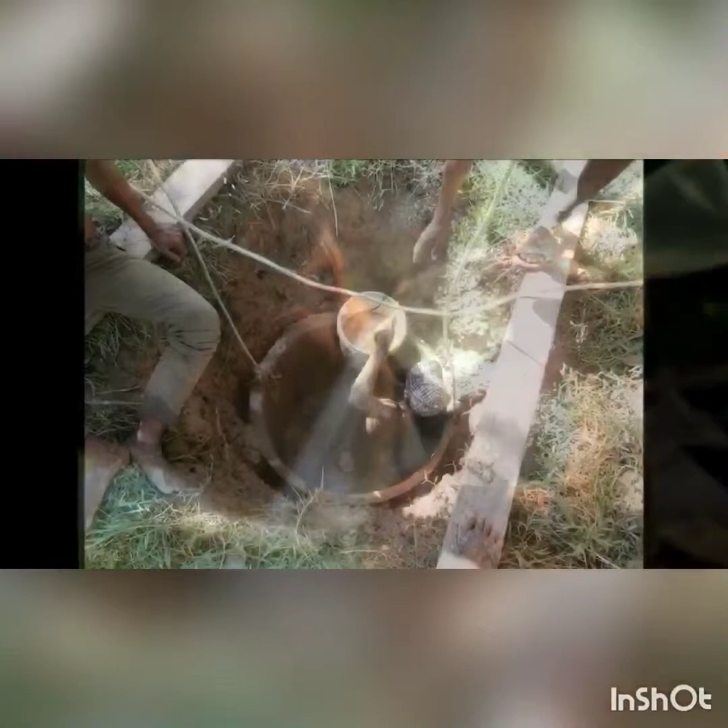In a country like Cambodia, the main source of any Cambodian's drinking water will come from rainfall. However, the rainfall is full of parasites and viruses which cause the Cambodians to get sick. The contaminated water mainly comes from improper waste disposal. Cambodians throw their trash on the floor, and that trash just sits in mucky water and leaks some toxins into it.

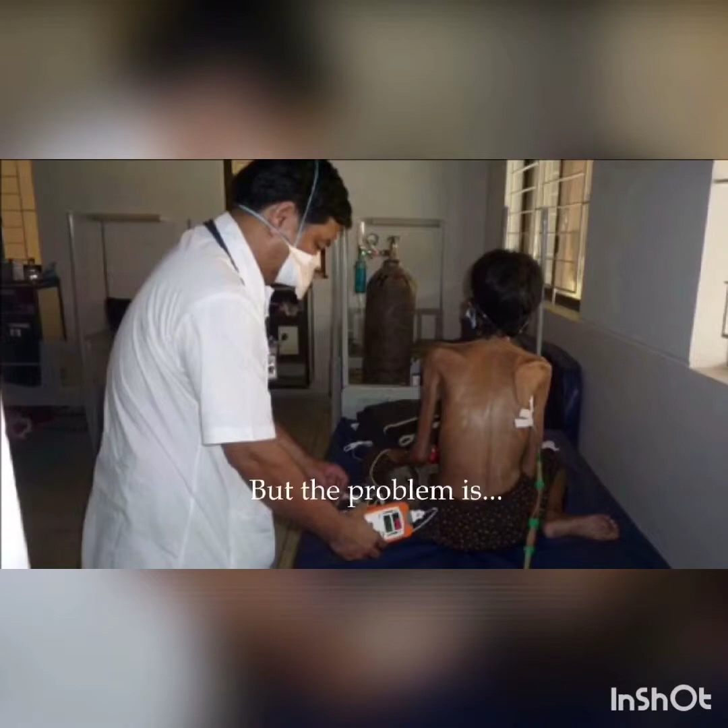The lack of infrastructure also causes the contaminated groundwater to mix with feces and other types of man-made waste and viruses, such as E. coli. Over 380 Cambodian children under the age of 5 die each year from diarrhea caused by the unsafe water and poor sanitation. The level of access to water supply in rural areas is significantly low, with approximately 80% of Cambodians living in rural areas having poor access to safe water and sanitation.

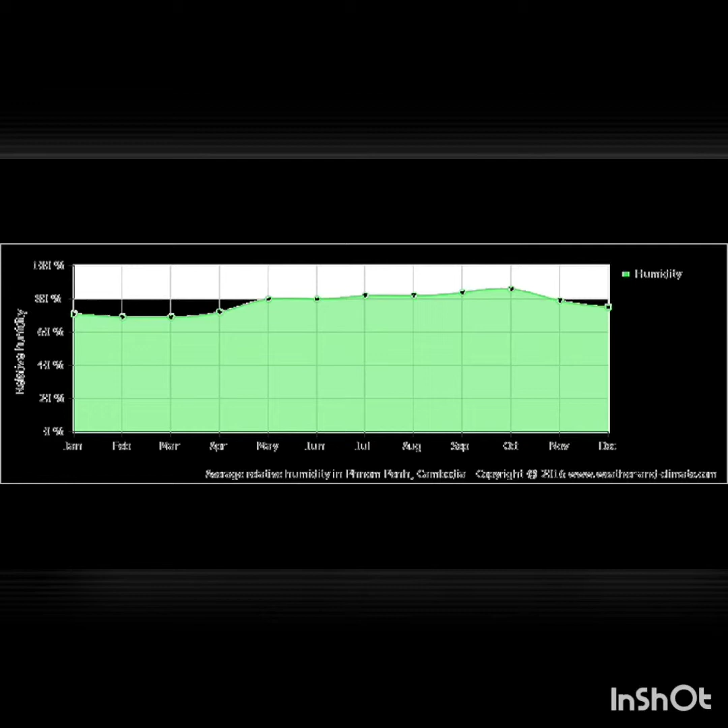So what can we do to improve the situation in Cambodia? Fortunately, the average annual percentage of humidity is 77%, and the major transportation in Cambodia is bicycle. Therefore, we decided to make a water purification machine attached on the bicycle, where a human acts as a generator to produce clean water during cycling.

We've found some companies that use a solar panel to let the bottle fill itself. Kristof Retezár is a designer who has created a unique bottle, exploiting the principle of condensation of moisture from the air to produce drinking water in any environment.

Of course, the amount of water produced depends on factors such as humidity or temperature. The device is powered by solar energy and comprises a condenser which functions as a refrigerator connected to a series of hydrophobic, water repellent surfaces. This bottle can produce half a liter of water in an hour under ideal conditions.

According to Retezár, if the ambient temperature is between 30 and 40 degrees Celsius and the humidity is between 80 and 90%, it will be in the best position to generate drinking water. But in reality there is always a certain percentage of moisture in the atmosphere as well. The bottle might work even in the desert.

The prototype includes a filter to prevent dust or insects in the water, but so far no pollutants are filtered. In this sense, Retezár is already proposing a version with a filter that will avoid that problem. The development has been christened with an appropriate name, Fontis. We actually did some modification based on the self-filling water bottle to make our own model.

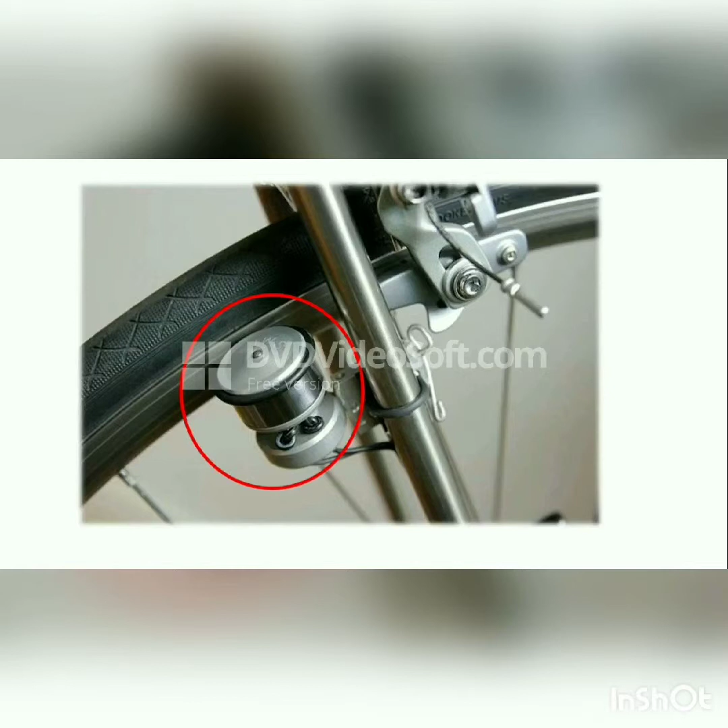In order to improve efficiency, we replace the solar power with human power, recycled and generated through a dynamo connected with the bicycle. When the wheel of the bicycle spins, it drives the dynamo through frictional force.

You may wonder how much energy can be generated by a human. In lab experiments, an average in-shape cyclist can produce about 3 watts per kg for more than an hour, for example around 200 watts for a 70 kg rider. It provides much more energy compared with a palm-sized solar panel, allowing more energy input for the condensation system.

Next is the condensation part. To achieve condensation, we will use a cooling system. Our cooling system is divided into two parts: the thermoelectric cooler and the airstream system.

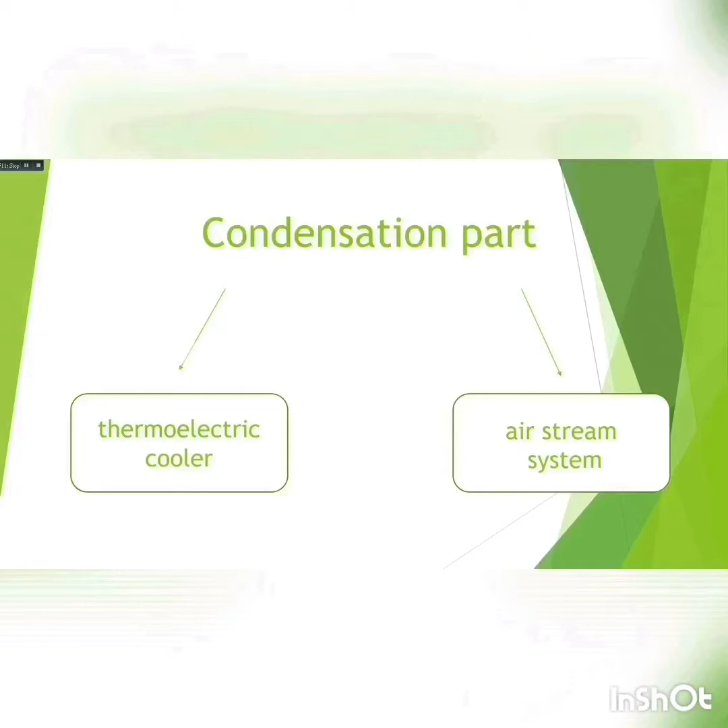The thermoelectric cooler operates by the Peltier effect. The device has two sides. When DC electric current flows through the device, it brings heat from one side to the other, so that one side gets cooler while the other side gets hotter.

The cool side will bring the moisture contained in the air to condense on a special surface. The resultant liquid water then drops into the bottle's main body and is stored.

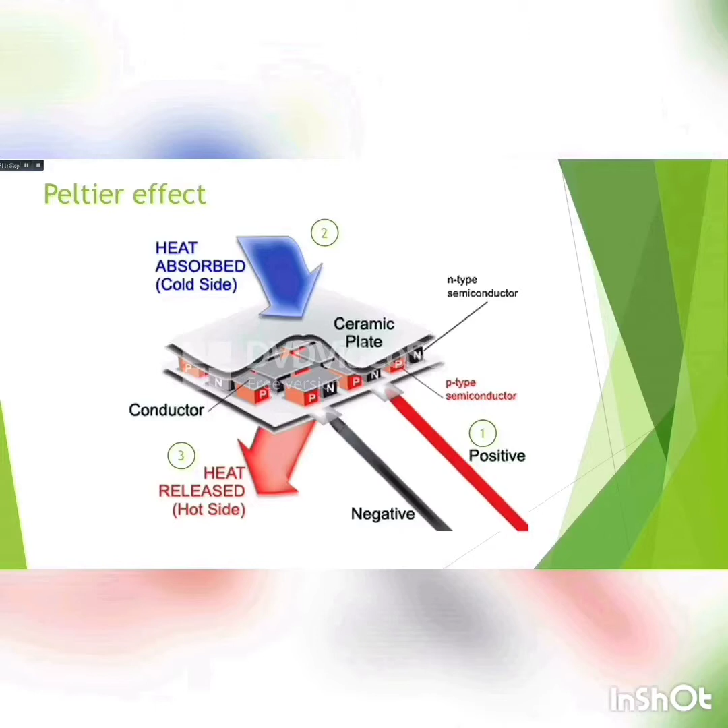In the airstream system, air enters the bottom chamber at high speed when moving forward with the bike. The airstream generated is used here in place of a fan to press large amounts of air into the cooling chamber without needing an extra energy source. It can also help cool down the moisture and support the performance of the small cooler.

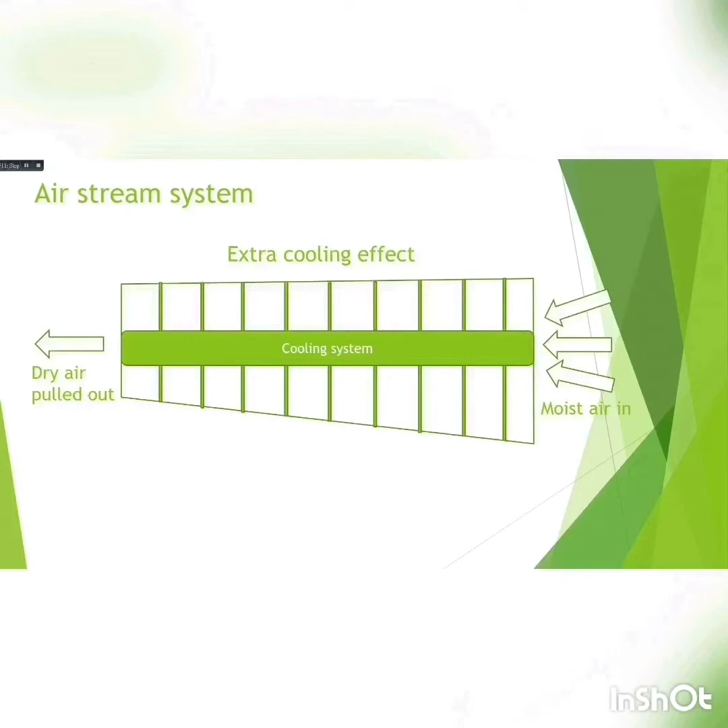To improve the performance of the system, the shape of the device is stopped by a little wall perforated non-linearly. Therefore, the speed of the air will be reduced, giving the air more time to lose its water molecules.

For the calculation, firstly we will calculate how much energy is needed for cooling down the temperature of the air in the chamber to the dew point temperature. The annual average temperature in Cambodia is 27 degrees Celsius, and the humidity is 78%. By the psychrometric chart, we can see that the enthalpy is about 72 kJ per kilogram.

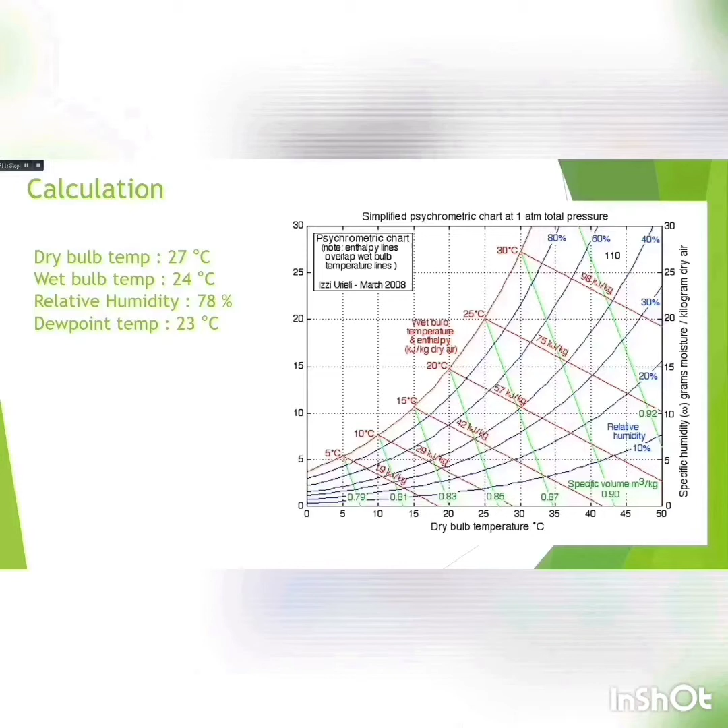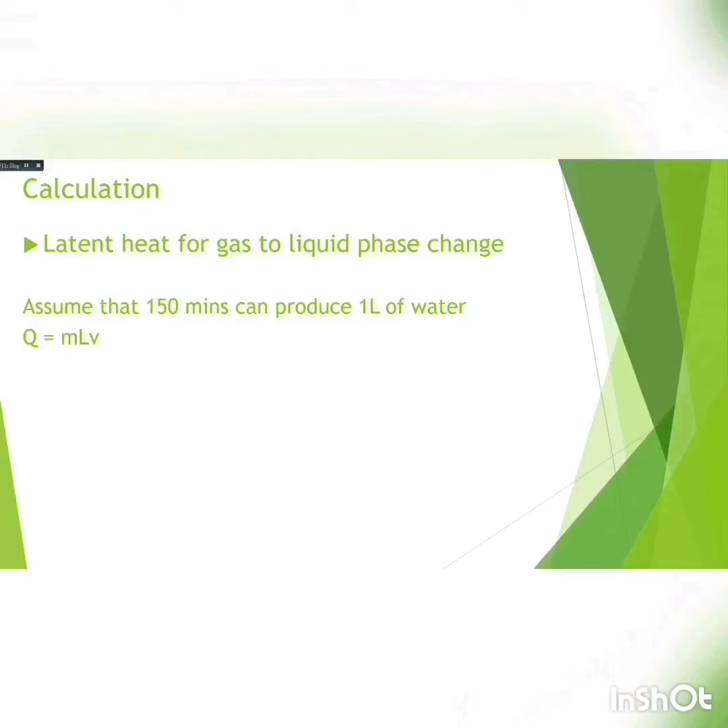Then we will calculate the latent heat for the gas to liquid phase change. Assume that 150 minutes can produce 1 liter of water. By the equation Q equals mLV, for 1 hour the energy required for latent heat is 252 watts per hour. Adding the enthalpy we just calculated, the total energy required is 272 watts per hour.

The in-shape cyclist can generate around 200 to 300 watts per hour of energy. Therefore, our device can work normally.

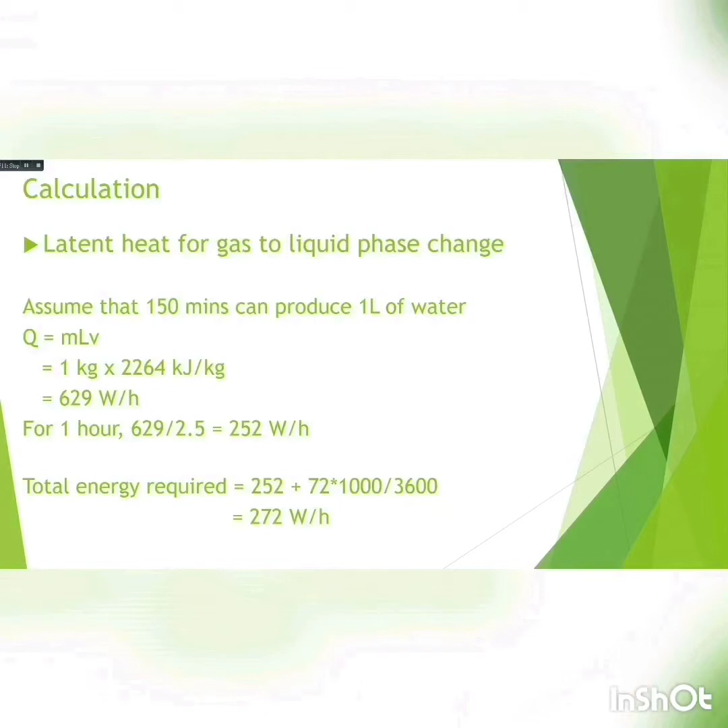We cannot just drink the water immediately after condensing because the condensed water contains impurities. As the Fontus video mentioned, it has a filter to prevent insects or dust from entering the water, but these are only the larger contaminants. It has yet to have a method to remove other smaller pollutants such as microbial pathogens and volatile emissions in the air from combustion processes.

Thus, we have decided to install a reverse osmosis water filter system. In normal osmosis, water flows naturally down its concentration gradient through a partially permeable membrane. This means it flows from the region of low solute concentration to the region of high solute concentration, which is not what we want when we want to purify water.

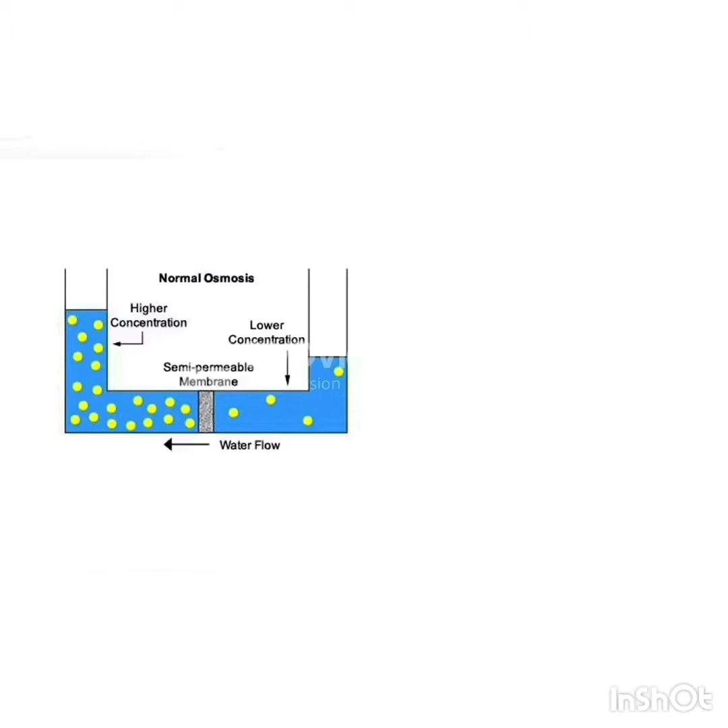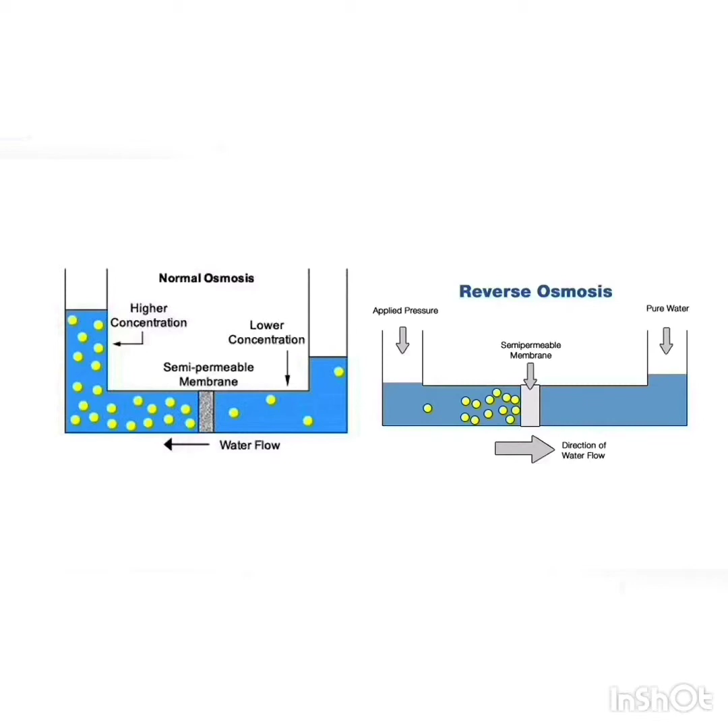But reverse osmosis is the process of forcing water from a region of high solute concentration by applying pressure in excess of the osmotic pressure, so water flows against its concentration gradient. The membranes are designed to allow water to pass through this layer while preventing the passage of solutes. This process requires pressure to be exerted on the high concentration side.

A reverse osmosis water filter system installed in this device at the highlighted region will be simple and straightforward. It has only a few simple components which, when put together, will work to purify the condensed water.

The first part is the cold water line valve that fits onto the cold water supply line, which is the pipe from the condenser leading to the bottle. The valve has a tube that attaches to the inlet side of the RO pre-filter.

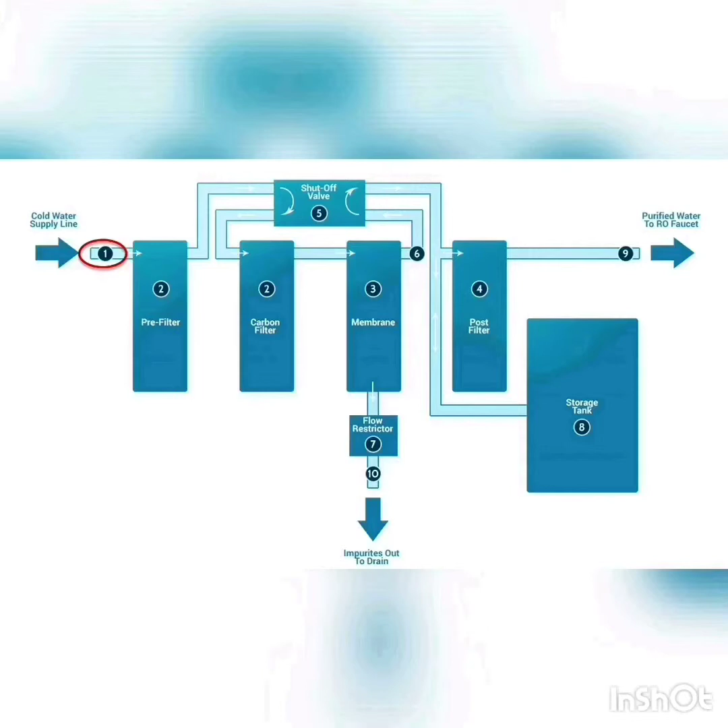Then comes the pre-filters. There may be more than one pre-filter, the most common being sediment and carbon filters. These pre-filters are used to protect the RO membranes by removing sand, silt, dirt, and other sediments that could clog the system.

The semi-permeable reverse osmosis membrane is designed to remove a wide variety of both aesthetic and health-related contaminants. After passing through the membrane, the water goes into a pressurized storage tank.

Before going to the RO faucet, the treated water goes through a final post-filter. The post-filter is usually a carbon filter. Any remaining tastes or odors are removed from the product water by polishing it.

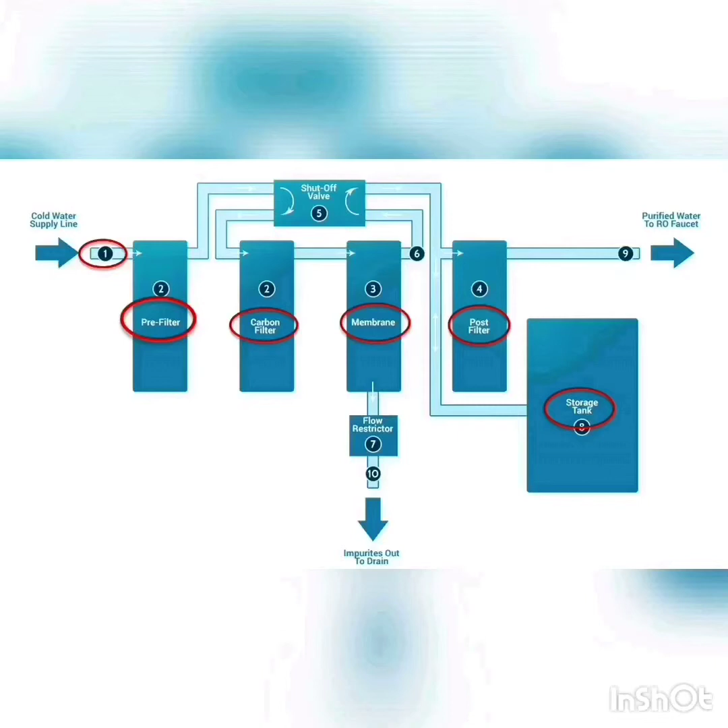To conserve water, the RO system has an automatic shut-off valve. When the storage tank is full, the automatic shut-off valve closes to stop any more water from entering the membrane. Once water is drawn from the RO faucet, the shut-off valve then opens to send the drinking water through the membrane. However, it will not be needed in our case because we do not have a very high flow of water from the condenser. Lastly, a check valve is located in the outlet end of the RO membrane.

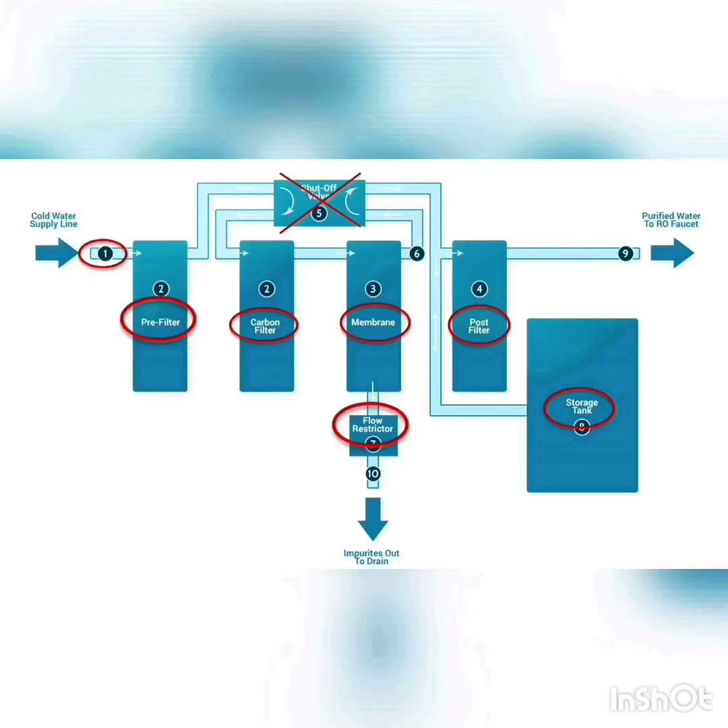It prevents the backward flow of treated water from the RO storage tank. A backward flow could rupture the RO membrane.

I'll tell you about the advantages, disadvantages, and also inform you about a few facts regarding the water crisis the world faces today. Let's begin with the advantages.

Our product uses human power, which is a renewable source of energy. You don't have to worry about contributing to global warming or climate change. Secondly, anybody who can ride a bicycle can use our product. You can be a child, an adult, or an elderly. It simply doesn't matter. If you can ride a bicycle, you will get clean drinking water.

Thirdly, many people in this world live in third world countries where they don't have access to uncontaminated drinking water. Our product will help to solve their water insecurity and alleviate their poverty.

Fourthly, there are many diseases that are spread through water, such as polio, cholera, diarrhea. It requires a lot of money to cure these diseases, and people in third world countries often don't have enough money to cover the medical cost. Thanks to our product, they don't have to worry about it.

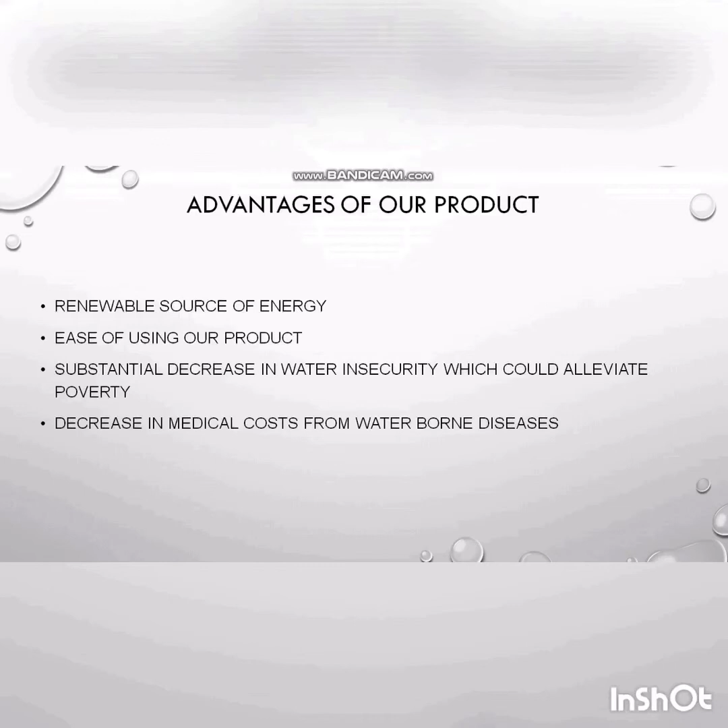Now, let's look at a few key facts regarding the scale of the water crisis the world faces today. 71% of the world's population has access to safe drinking water in their homes. Do you know what this means? 29% don't have access to clean drinking water. 29% in the 21st century. Can you imagine it? And to make matters worse, 2 billion people drink water that is contaminated with feces.

Us living in HKUST in Hong Kong cannot imagine it. We spend so much time in showers and waste a lot of water. In other parts of the world, people have to drink it, let alone use it for shower or for some other purpose. They have to drink water that is contaminated with feces. And if you think the crisis is bad, it is only going to get worse. Our product might be part of the solution to solve this crisis.

Now let's look at the disadvantages. Every product has some disadvantages, some drawbacks. Our product's greatest drawback is that it depends completely on temperature and humidity. If the temperature is not high enough, if the humidity is not high enough, you will not get clean drinking water. I know this is a big drawback, but every product has it, and so does ours.